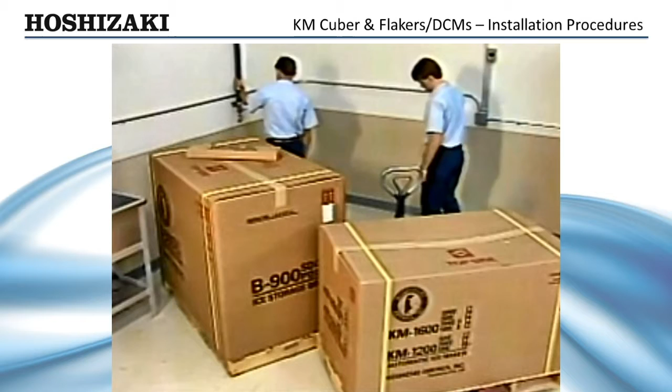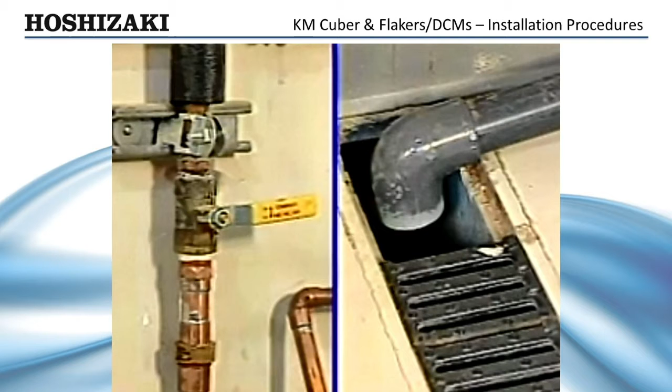There are several things you should do before installing the ice maker. First, take a look at the installation site. Remember, these ice makers are not intended for outdoor use. For best results, the ice maker should not be located next to ovens, grills, or other high heat producing equipment. The location should provide a firm, level foundation for the ice maker and storage bin. Check the installation site to be sure there is an adequate water supply and proper drainage.

Be sure to allow for a 6-inch clearance at the rear, sides, and top of the machine's intended location to allow for proper air circulation and ease of maintenance and service. If you are installing an auger-type ice maker, it is necessary to allow adequate clearance above the unit to allow for auger removal during service.

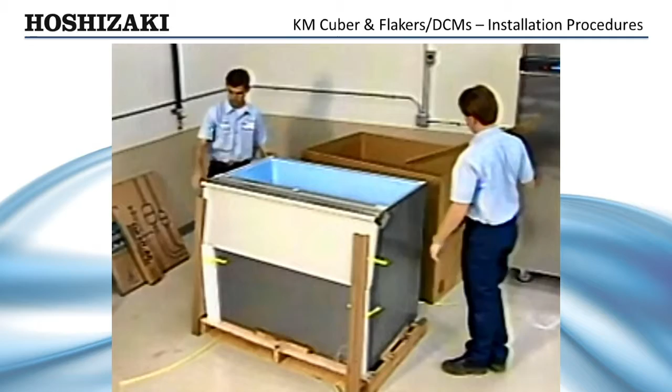Next, inspect the exterior of the cartons for visible damage and unpack the storage bin. Make sure it is the correct bin for your application. Attach the 4 adjustable legs provided to the bottom of the storage bin and position it in the selected permanent position.

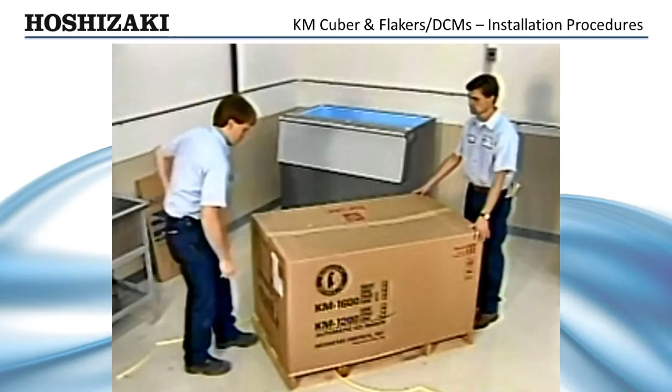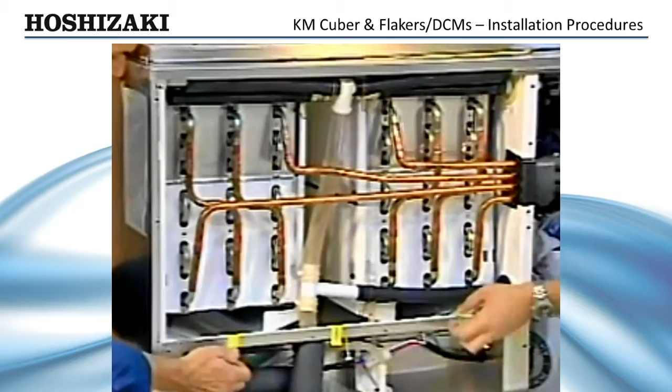Then, unpack the ice maker, being careful to save the registration cards located in the pouch on the carton. Also, remove all packing material and tape from inside of the machine and remove the package containing the installation manual and accessories. Always refer to this manual or your Hoshizaki technician's pocket guide and carefully follow the instructions for installing the ice maker.

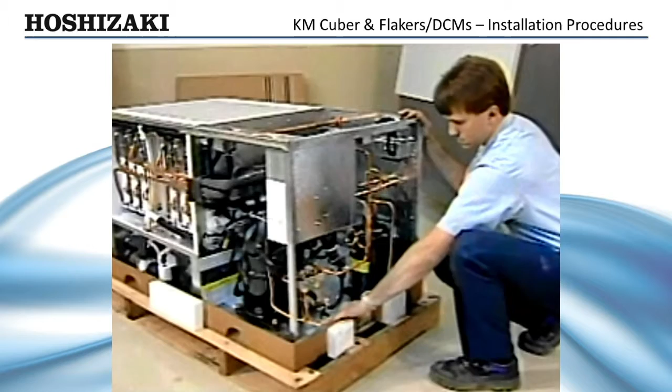To prevent damage, remove the outer panels before installing the ice maker. Now, check to see that the refrigerant lines do not rub or touch other lines or surfaces. On air-cooled units, be sure that the fan blade turns freely. Check that the compressor is snug on all mounting pads. Finally, check the nameplate to make sure that your electrical service is the same as the voltage specified.

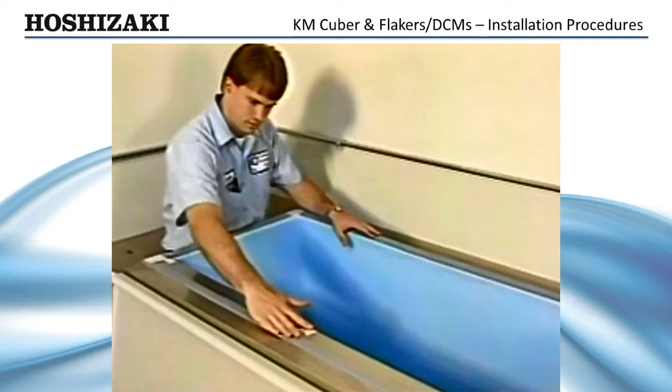The gasket provided with Hoshizaki bins provides an adequate seal between the two units. Place the ice maker on the top of the storage bin and secure it by using the 2 mounting brackets and 4 bolts provided. Level the ice maker storage bin in both the left to right and front to rear directions using the adjustable bin legs.

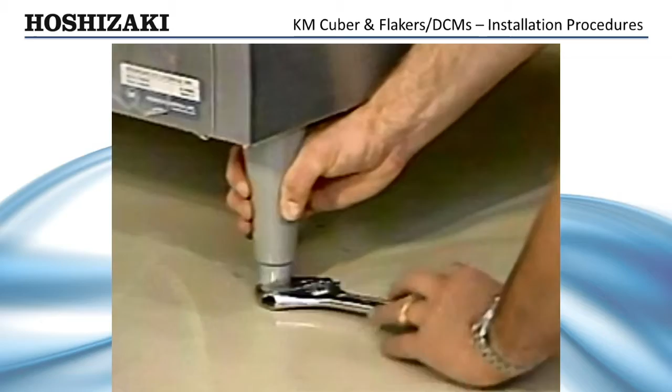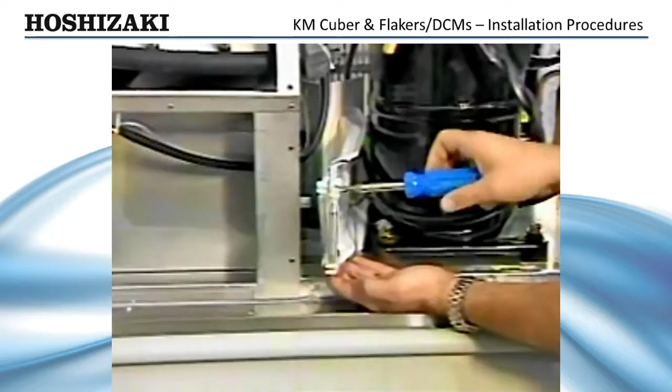If you are stacking 2 S units on a single bin, remove the top panel and ABS evaporator cover from the lower unit. Set the second unit on top and secure it with the brackets provided in the accessory package. Remove the bin control holder and bulb from the top bracket and route it to the bottom unit bracket, taking care not to touch the suction or discharge lines or the compressor base with the control capillary tube. Use the top bulb holder to secure it to the bottom bracket.

Plug in both bin control plugs and be aware that Hoshizaki's stacked units operate independently of each other. When making the electrical connections, it is important that they be made in accordance with the instructions on the warning tag provided with the leads in the junction box. Make sure the white leads are connected to the neutral conductor of the power source.

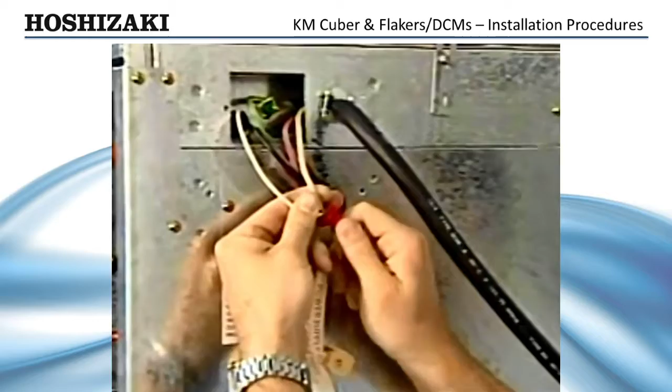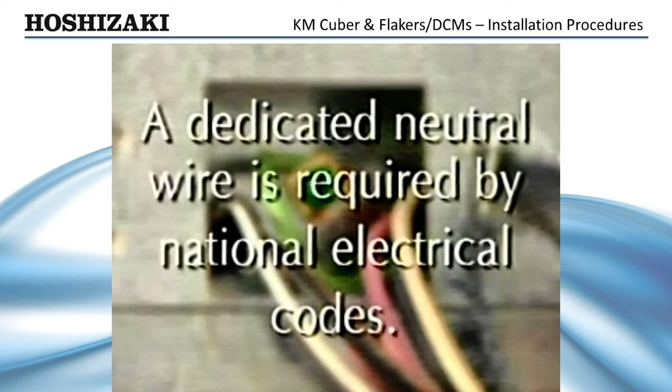To prevent possible electric shock or damage to the machine, be sure to install a proper ground wire to the ice maker. On 208-230 volt single-phase applications, a dedicated neutral wire is required by national electrical codes. A separate power supply or receptacle is required for the installation of each ice maker. Be sure to check the nameplate for proper capacity.

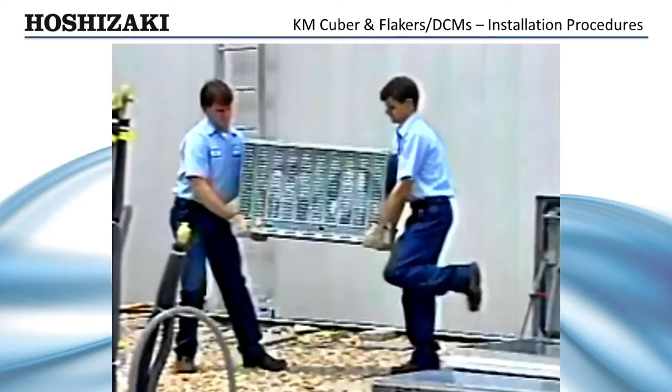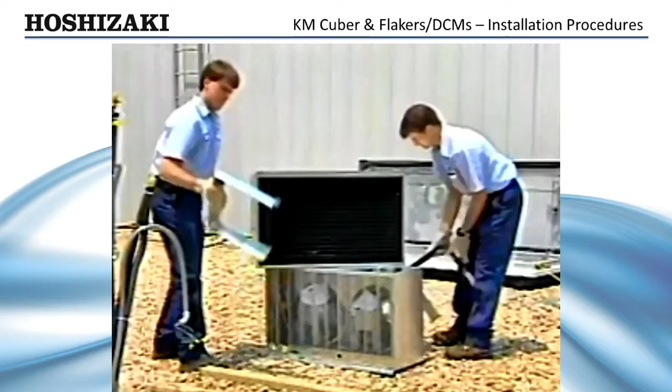On units requiring the installation of a remote condenser, the unit must be installed in a permanent location. If the condenser unit supplied is not the appropriate Hoshizaki condenser, be sure that the application has been approved in writing by the Hoshizaki Technical Support Department.

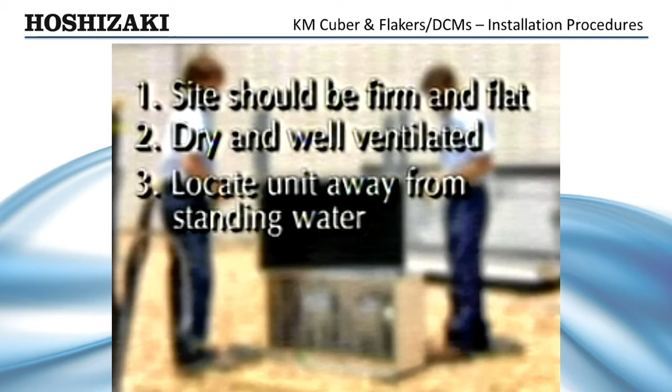The installation site should be firm and flat. The location should also be reasonably dry and well ventilated. This means locating the unit away from standing water and providing a 24-inch clearance on both the front and rear of the unit.

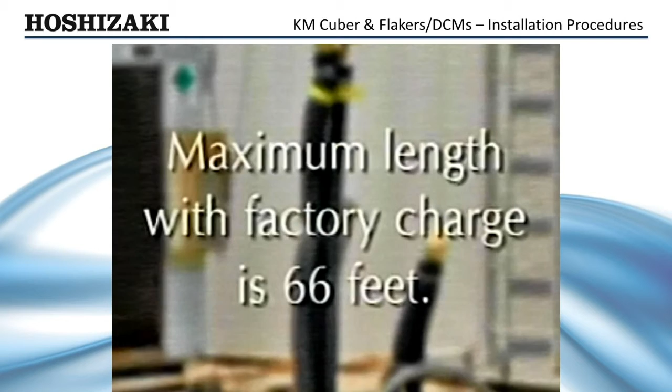When locating the condenser, keep in mind that the maximum refrigerant line length with a factory charge is 66 feet. This can be extended to a maximum of 100 feet with an additional charge. Consult the manual for recommendations on line size and charge amounts.

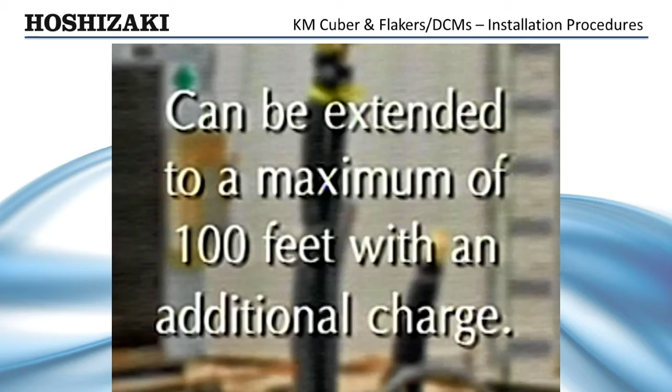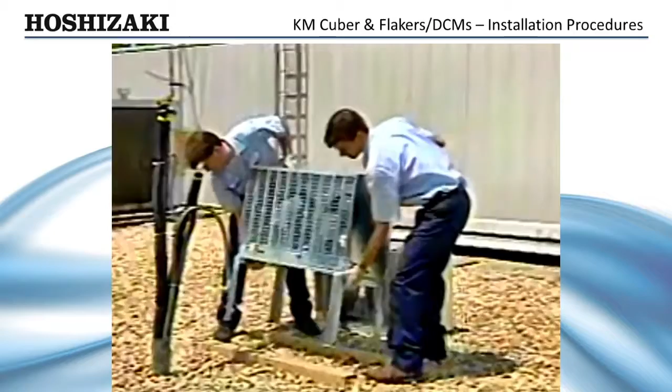To install the remote condenser unit, first remove it from the carton and secure the legs squarely with 8 M8 by 16mm hexagon bolts and M8 nuts. Next, secure the legs to the roof curb with 8 bolts in the 8 mounting holes.

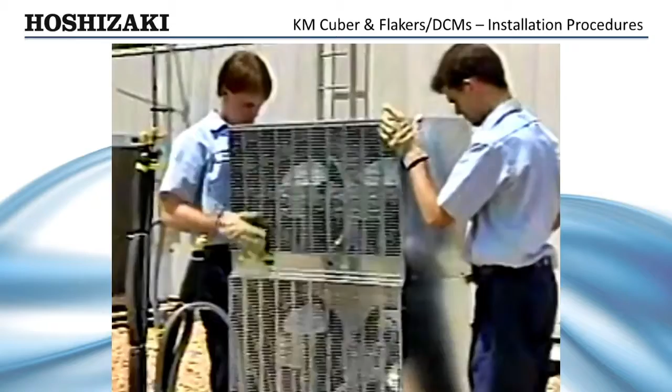When installing 2 remote condenser units, you may stack them to save space. Attach the upper condenser unit on top of the lower unit and secure it with the 4 screws provided.

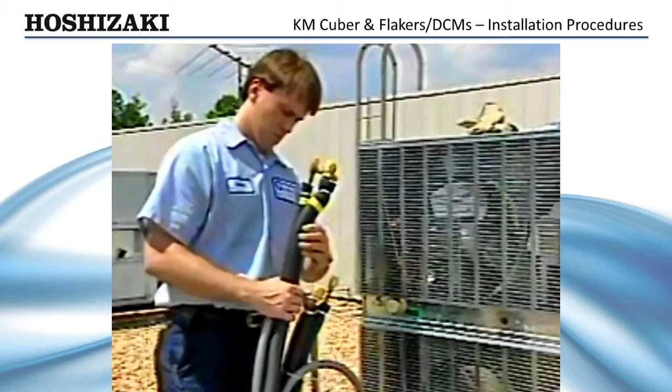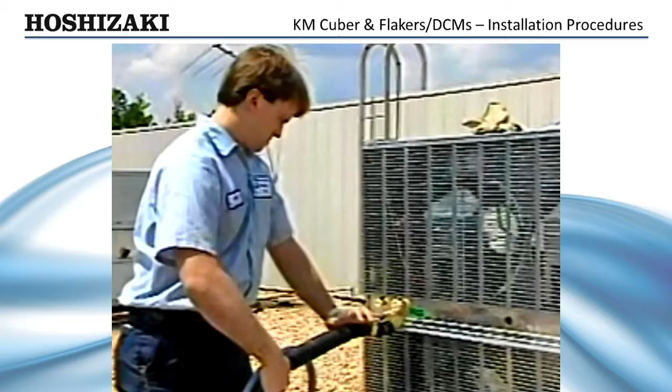When installing 2 copper tubing sets between the ice makers and condenser units, take extra care to mark the refrigerant lines and electrical connections. This will ensure they do not get crossed during installation. Each copper tubing should be sized properly and insulated separately.

Pre-charged tubing kits are available from Hoshizaki America in 20, 35, and 55-foot lengths.

Line sets fabricated on the job should be evacuated through the charging ports on the Aeroquip couplings and charged with refrigerant vapor to a pressure of 15 to 30 psig. Pre-charged tubing kits do not need to be evacuated.

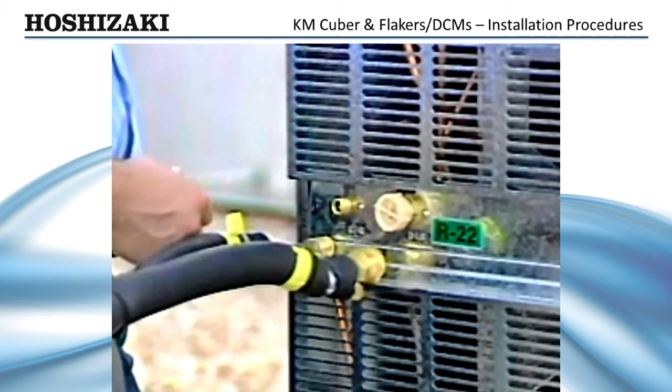To connect line sets to the condenser and ice-making units, remove the plastic caps that protect the couplings and place a small amount of clean, dry refrigerant oil on the O-rings and male threads of each connection.

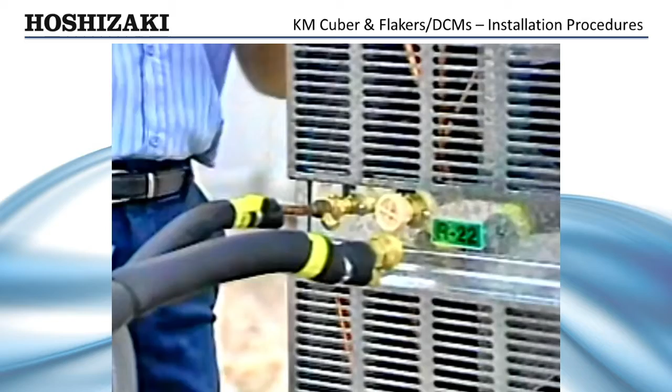Connect the refrigerant lines equipped with the proper size Aeroquip fittings to the connection of the condenser unit and ice maker. Then tighten the fittings until they bottom out and turn them a quarter round more. This provides a leak-free brass-to-brass seal.

The fan control wiring from the ice-making unit requires a 3-wire circuit. To connect this circuit, first remove the louver panel and junction box cover from the condenser unit. This circuit should be routed through seal-tight conduit.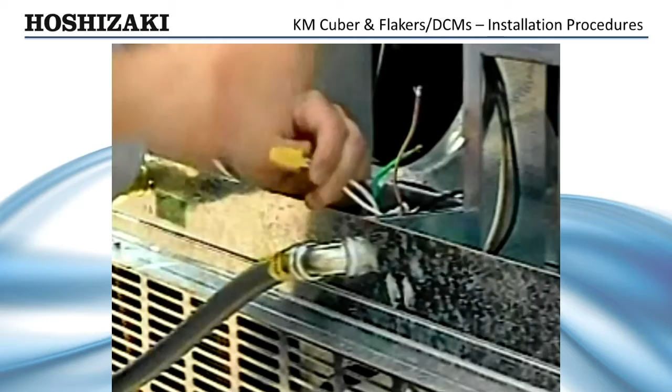A disconnect may be required by local code. Connect the fan motor leads in the junction box of the remote condenser unit to the fan motor leads in the junction box of the ice maker. A proper ground wire is required to prevent possible electrical shock.

The ice maker inlet water line must be sized correctly for proper operation. Check your manual carefully to be sure which size is required for the ice maker you are installing. Depending on local water quality, installation of an external filter with an adequate flow rate may be required for the ice-making inlet.

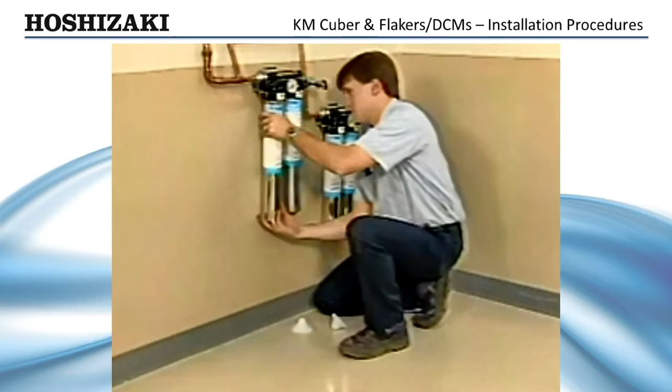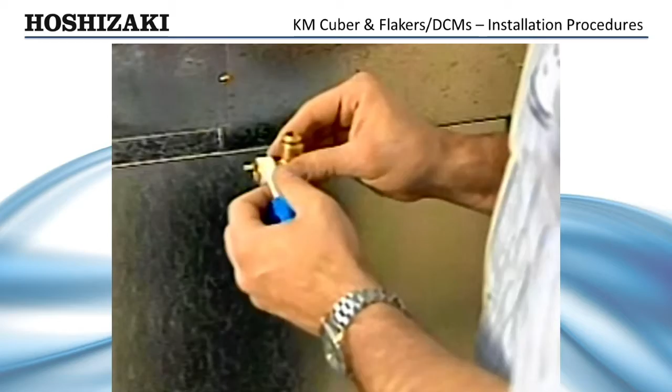The water supply pressure should be a minimum of 10 psig and a maximum of 113 psig. If the pressure exceeds 113 psig, you will need to install a pressure-reducing valve.

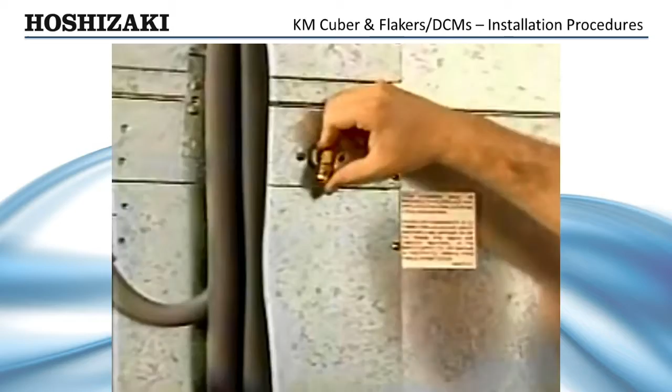On water-cooled models, 2 separate water supply inlets are provided: one for the ice-making inlet and the other for the water-cooled condenser inlet.

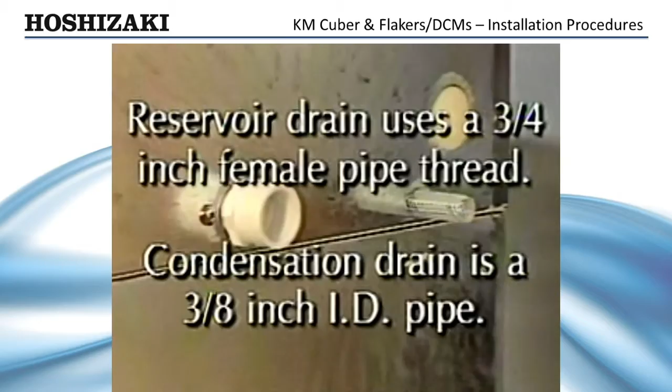The drain outlet for the ice maker reservoirs uses a 3/4 inch female pipe thread, or FPT. The drain for condensation is a 3/8 inch ID pipe.

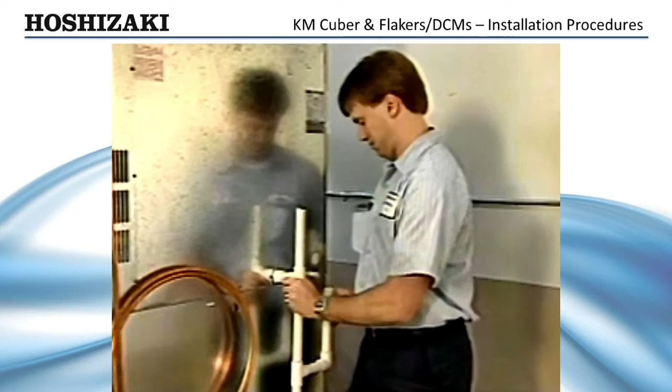Be sure the ice maker drain and the condenser drain piping connections are made separately from the bin drain. Hard piping with copper or PVC is recommended.

On water-cooled models, a separate 3/8 inch FPT connection is provided for the condenser drain outlet.

All Hoshizaki ice makers should be installed in accordance with all applicable national, state, and local regulations. Also, a backflow preventer may be required by local codes.

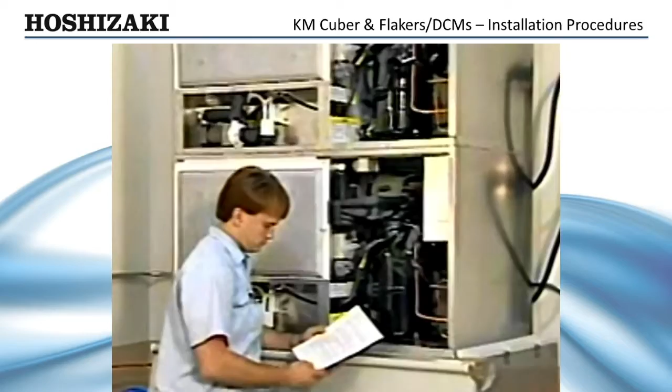Now that you have installed the Hoshizaki ice maker, review the final checklist provided in the installation manual.

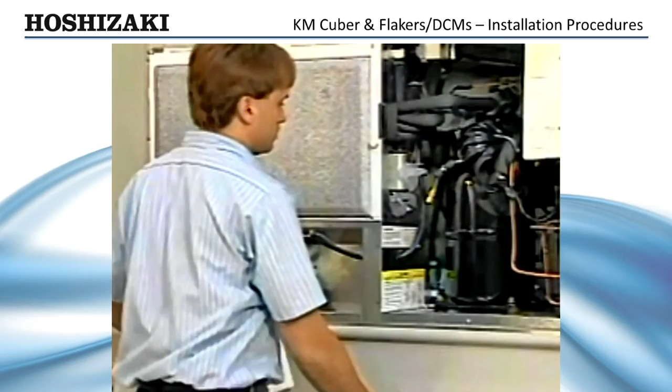At the point where the list requires you to start the ice machine, flush the water system thoroughly and check the unit for proper operation.

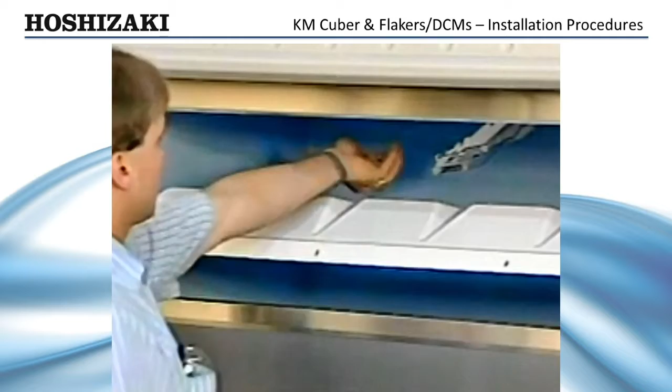Check the bin control switch for correct operation and position. This can be accomplished by holding an ice cube in contact with the bulb while the ice maker is running. The machine should stop within 6 to 10 seconds.

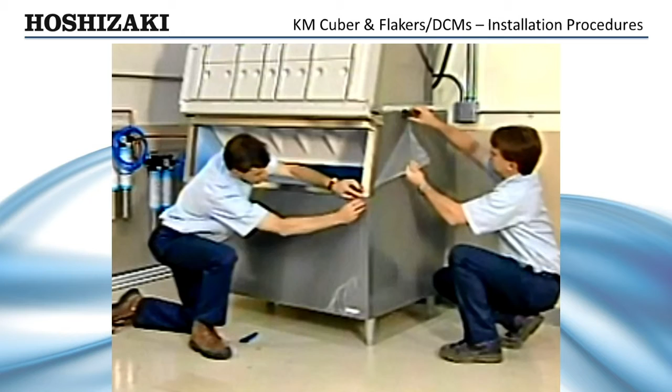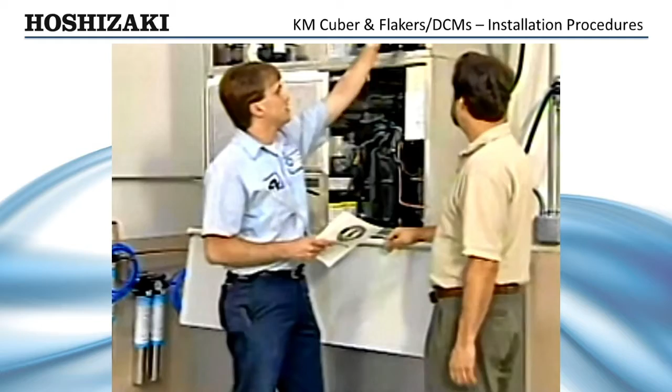Once the installation is complete, carefully score the edges of the protective plastic film and peel the film from the exterior panels. Make sure to give the end user the instruction manual and review the operation of the ice maker, stressing the importance of performing the recommended periodic maintenance.

Also, be sure to give the end user the name and phone number of an authorized service agent. Remind them to fill out the warranty tag and forward it to the factory for warranty registration.

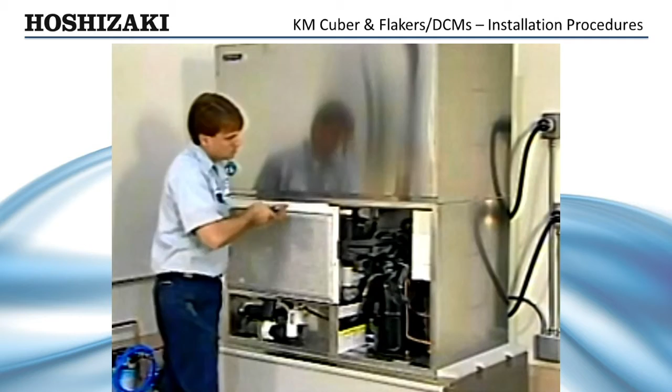Once you have successfully completed the checklist, you can be sure that the Hoshizaki ice maker is installed correctly and will avoid the unnecessary problems that sometimes occur due to improper installation.

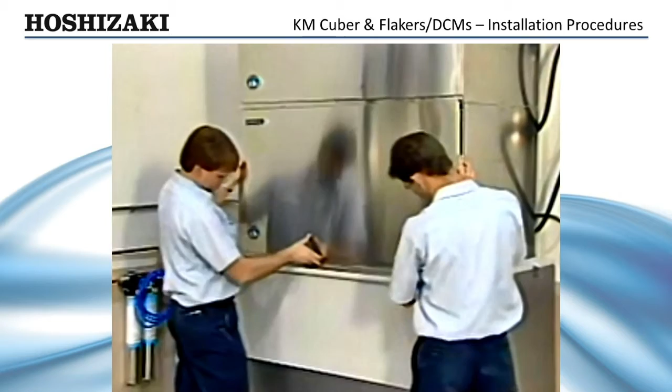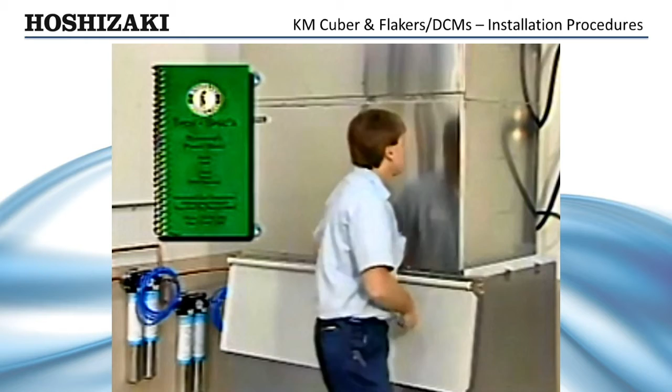Remember, while this video has shown you the proper installation procedures, you should always refer to the ice maker manual or your Hoshizaki Technician's Pocket Guide for detailed installation information.